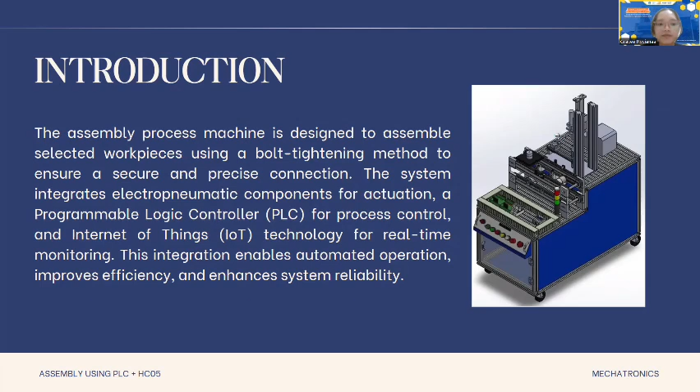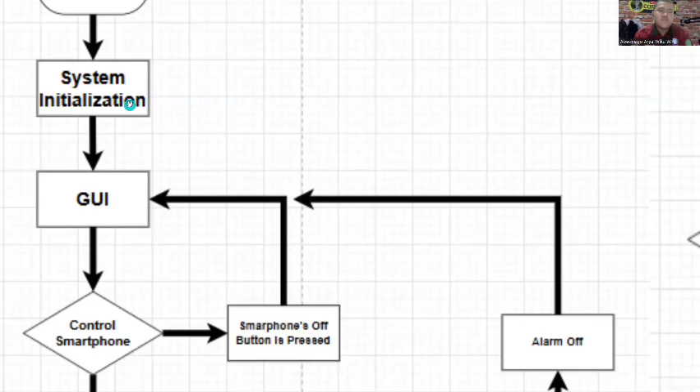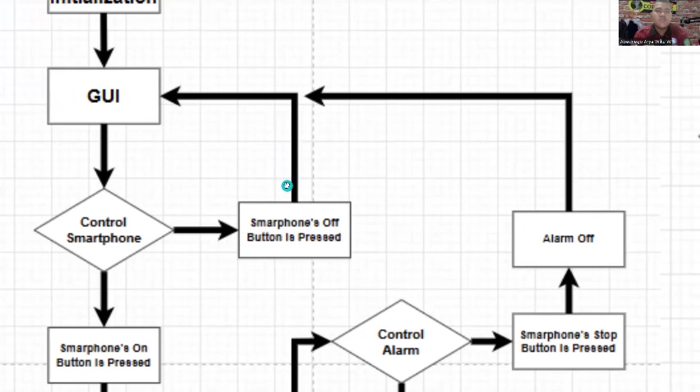We have a block start, and after that the system will initialize, and we have a GUI on smartphone and laptop. We go to the decision block, we have control smartphone. If the smartphone off button is pressed, we go to the GUI. But if we press the smartphone on, the camera will start scanning.

We go to the decision block. If operator not detected, the alarm will turn on, and control alarm will go to on. We have a decision block again. If the smartphone stop button is pressed, the alarm will be off and go to the GUI. But if the smartphone stop button is not pressed, the alarm stays on until the stop button on the smartphone is pressed.

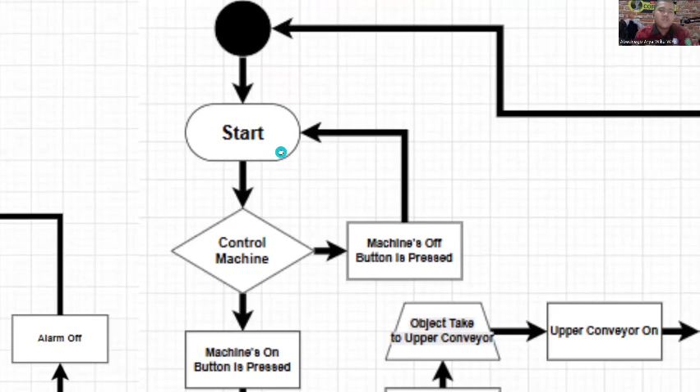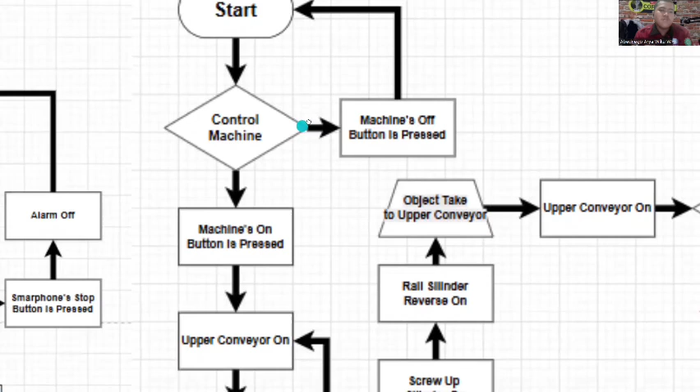So we go to the decision block in camera scanning. If operator is detected, the IoT precondition becomes active and proceeds to the machine. On the machine side, we have start on panel machine, which controls the machine. If machine off button is pressed, we go back to start. But if we press machine on, the sequence begins, like upper conveyor on, and then inductive sensor one will detect the object.

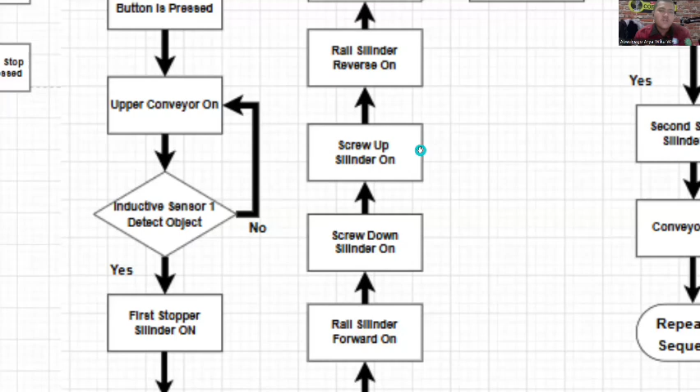If no object detected, the upper conveyor stays on. If yes, the first stopper cylinder turns on, then the upper conveyor turns off, and we go to the manual block: object taken by rail to screw cylinder. After that, rail cylinder forward on, screw down cylinder on, screw up cylinder on, and rail cylinder reverse on. This is the block to assemble the object with the screw.

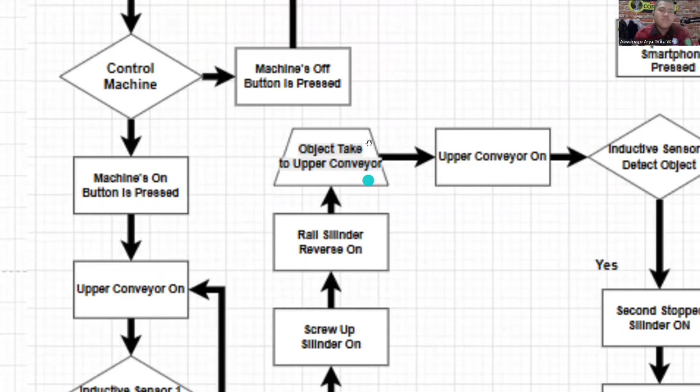Then we go to the manual block: object taken to the upper conveyor. The upper conveyor turns on, and we go to the decision block. Inductive sensor 2 will detect the object. If no, alarm turns on, and we go to control alarm, same as on the IoT side.

If yes, object detected, the second stopper cylinder turns on, conveyor 2 turns on, and the sequence repeats. To stop the machine, we have stop on the panel and emergency stop to quickly halt the sequence. We go to the next slide.

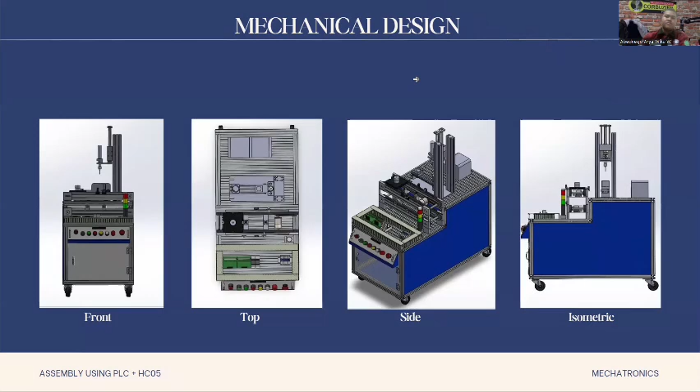In this slide, this is the mechanical design of our station. We use CAD software to validate the design, precision, and functionality. As you can see in this orthogonal view, it's from top and side as well as the isometric view. The structure is built upon joining profile cases. The upper section has the actuator system over the assembly process, while the control panel and electrical components are integrated into the base of the chassis to optimize space and ensure accessibility.

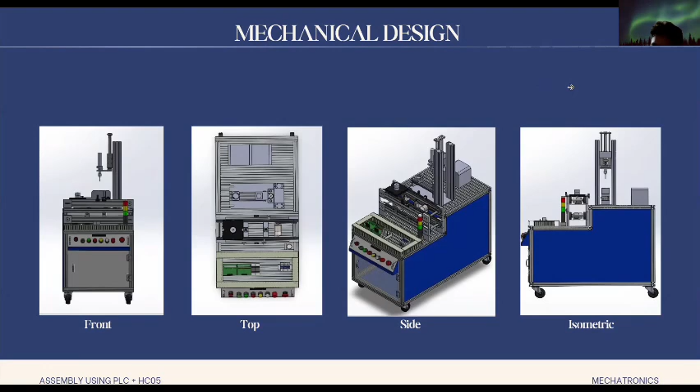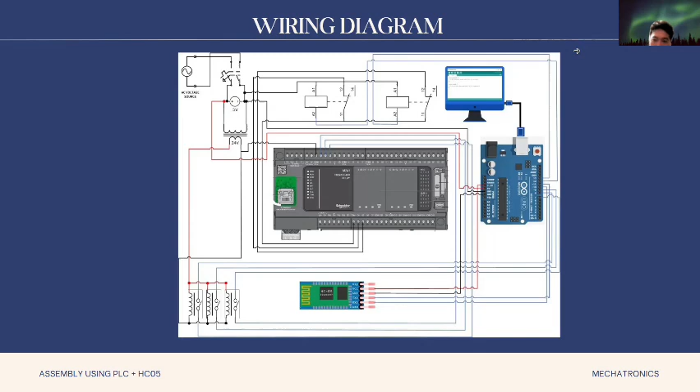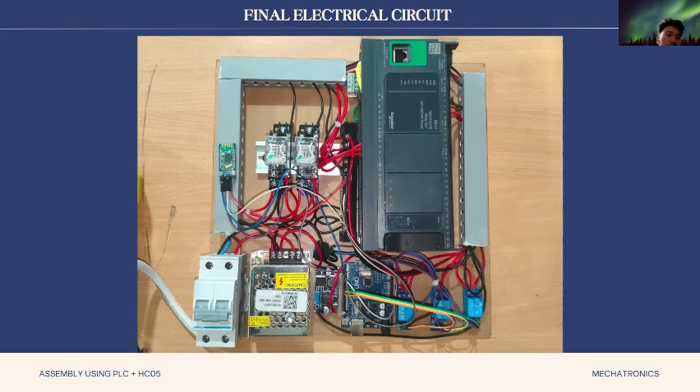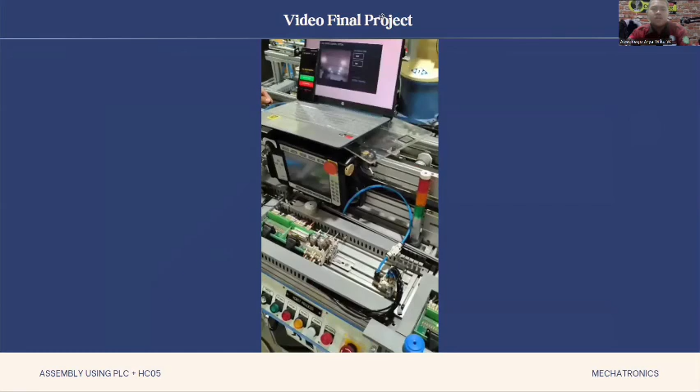Next, this is our demo video recording of our project.

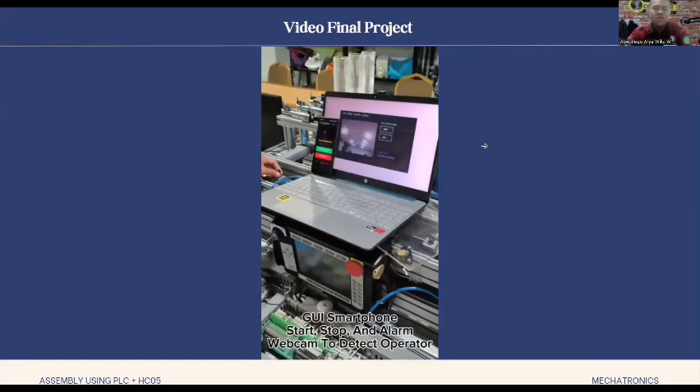As you can see in this slide, we have a GUI smartphone with start, stop, and alarm, and a webcam to detect the operator.

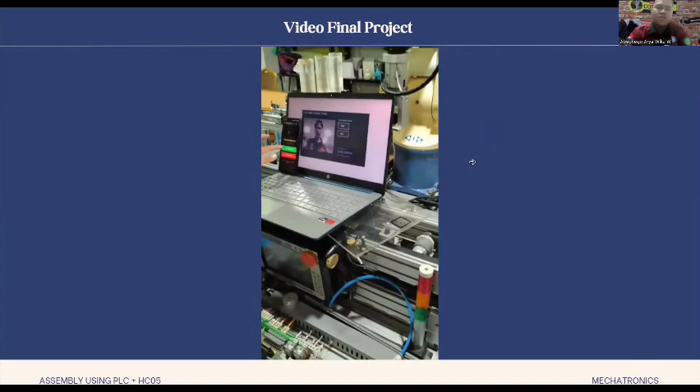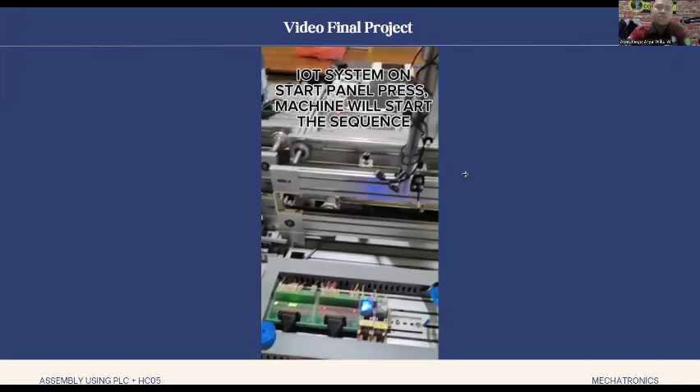If the start button on the smartphone is pressed but the operator is not detected by the webcam, the start smartphone will not give a signal. As you can see in the slide, when IoT input is off, the start panel will be disabled and won't give a signal. So we must activate the IoT system, then the machine can start running the sequence.

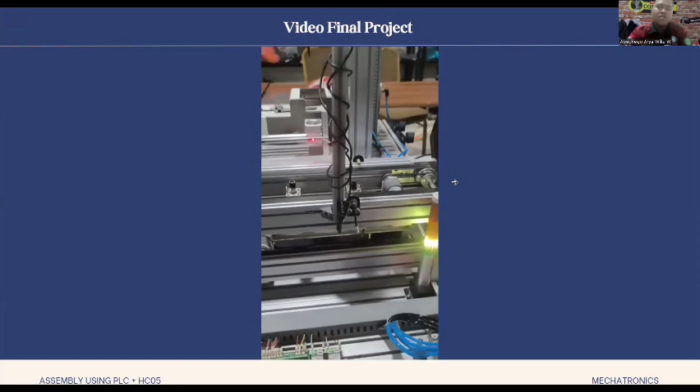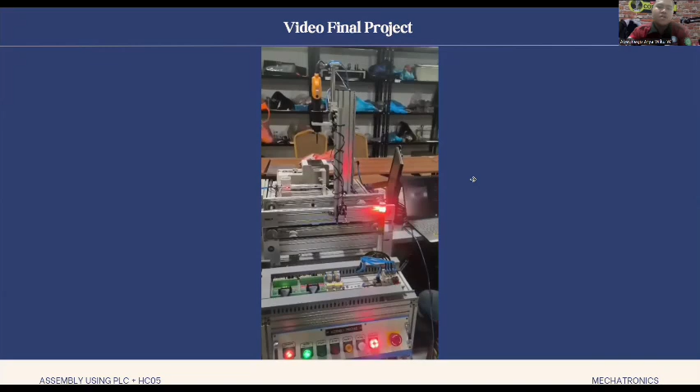This is an example of the alarm if inductive sensor 1 doesn't detect the object. We have added a timer, and then the alarm will turn on.

To turn off the alarm, we can press stop on the GUI smartphone or emergency on the machine, and then we must press reset and home to start the machine.

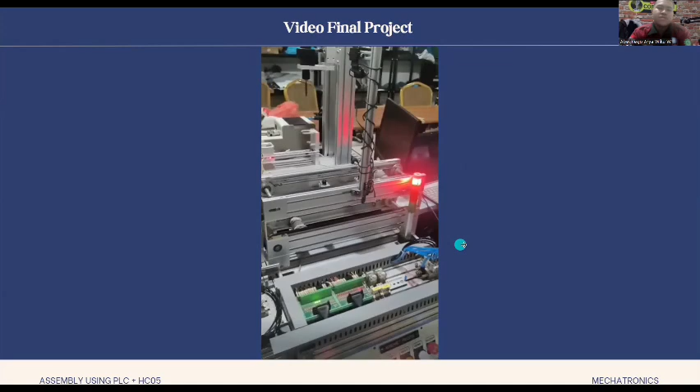In this video, we will try to use a pallet and object. We must press start again on the smartphone, and then the start on the machine will turn on.

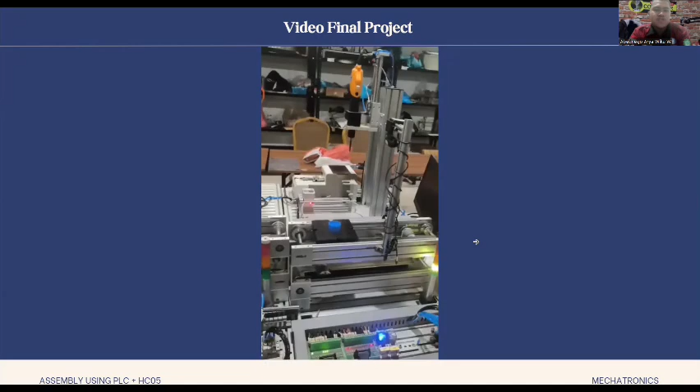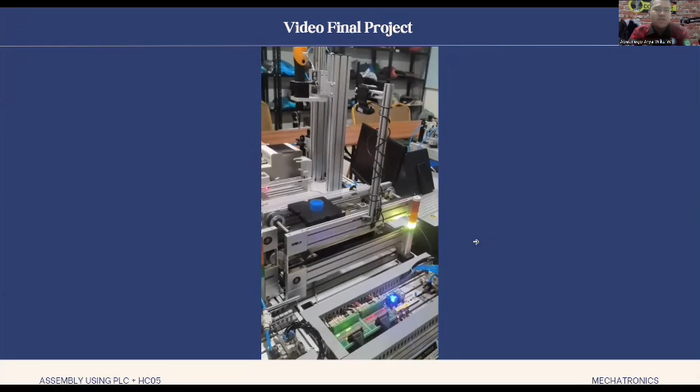So this is the sequence of our machine. The pallet will turn on, and then inductive sensor 1 will detect the pallet and turn off.

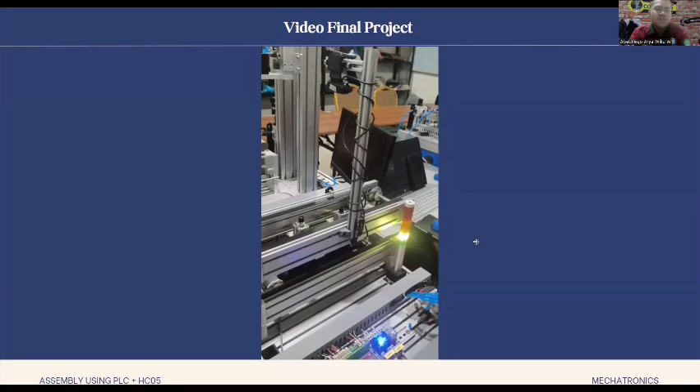After one sequence finishes, it will repeat. To stop the sequence, we must press stop or emergency.

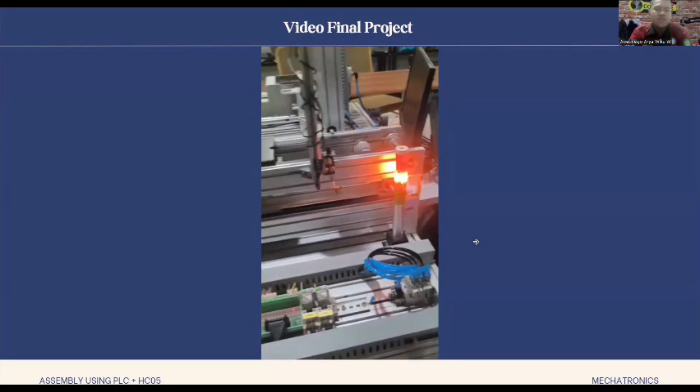This is what happens when we press the emergency button: the system will stop quickly, and we must press reset and home.

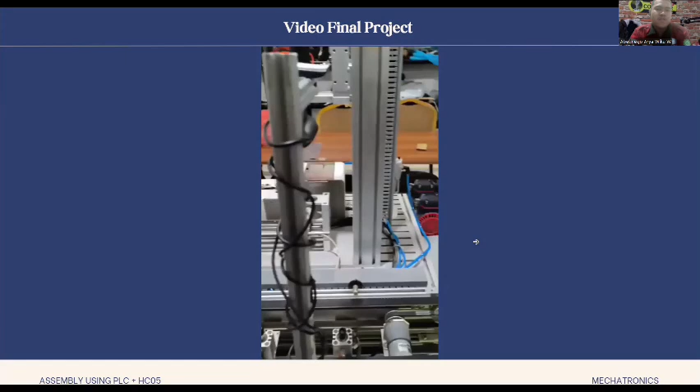This is an example of when the operator leaves the webcam view. Sorry, this is an example of when the stop panel is pressed, which will stop the machine after finishing the current sequence.

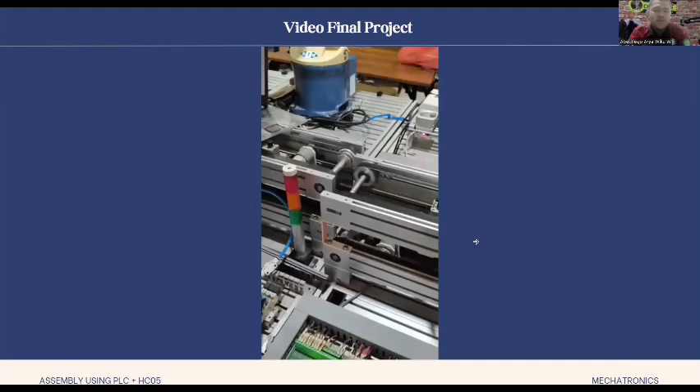The red indicator shown here indicates that the machine is stopped.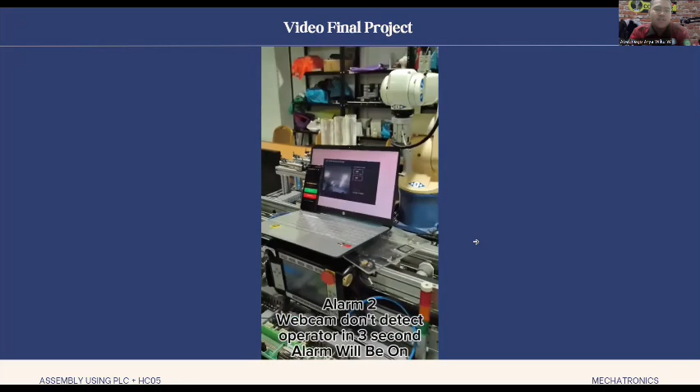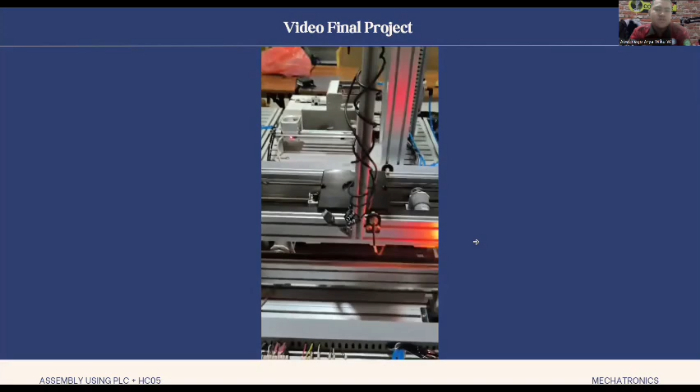This is an example of when the webcam doesn't detect the operator for 3 seconds and the alarm turns on. To turn off the alarm, we can press the buzzer, emergency, or stop on the smartphone, and press reset and home again to start the machine.

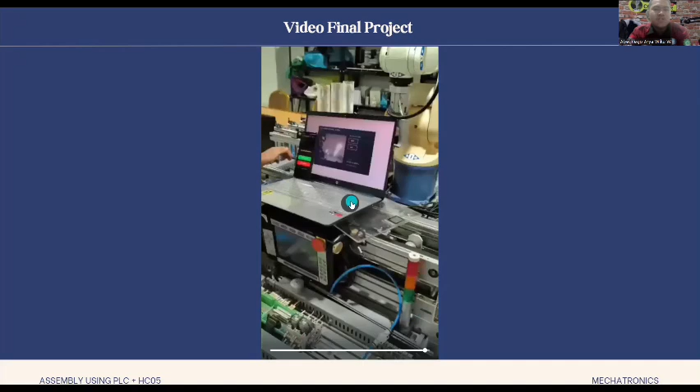Okay, that's it for the video final project demo of our PLC project. We're going to the next slide to explain to our friends.

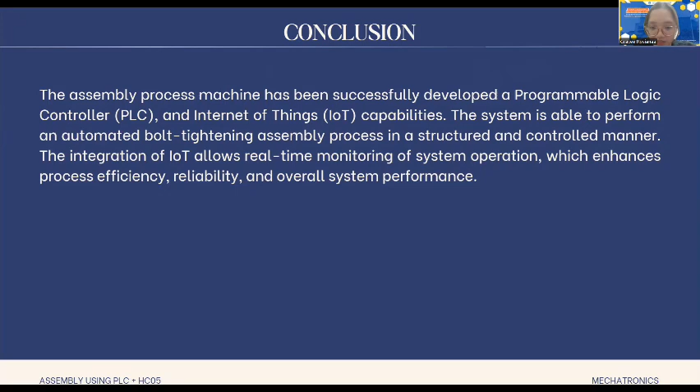The conclusion of our project: the assembly process machine has been successfully developed with programmable logic controller and Internet of Things capabilities. The system is able to perform and automate the bolt tightening assembly process in a structured and controlled manner. The integration of IoT allows real-time monitoring of system operation, which improves process efficiency, reliability, and overall system performance.

In conclusion, this project is able to detect, inspect, and handle objects automatically with minimal human intervention, improving accuracy, consistency, and overall productivity. We hope this project can provide a practical reference for industrial automation and quality control applications.